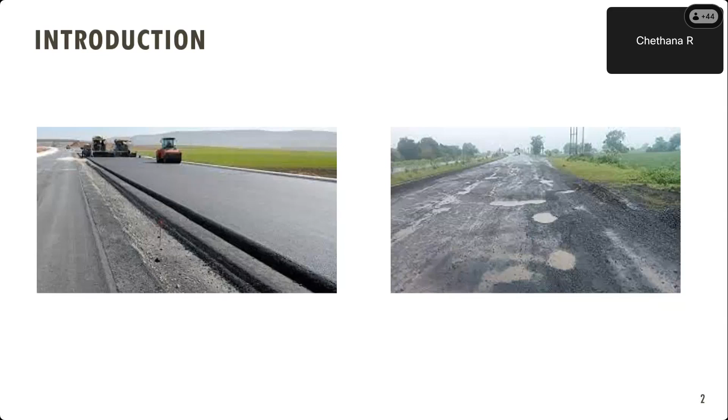Coming to that, I am just showing two scenarios. In India, we have heterogeneous traffic conditions, so most of the highways are loaded mostly by trucks: 2-axle, 3-axle, multi-axle trucks. Some of the highways might not be loaded. So that is the criteria that we need to be considering as well.

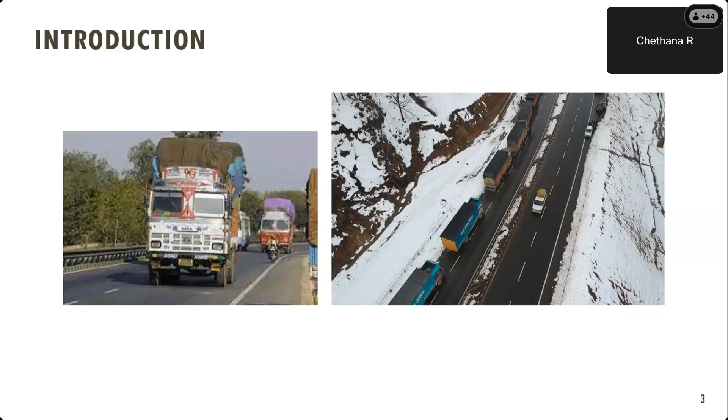When we say serviceability, since the pavement is an infrastructure, it is expected to behave in a certain manner, or be serviceable to the users who are using the pavement. Right from the excellent condition to the failed condition, which we saw in the second slide, a failed condition could be the end of the pavement, where it undergoes rehabilitation.

Again, we could be dealing with different kinds of maintenance strategies. We are not talking about a single material or a single kind of bituminous mixture, or any other type of material. We could have a wide variety of materials that could be chosen for the maintenance.

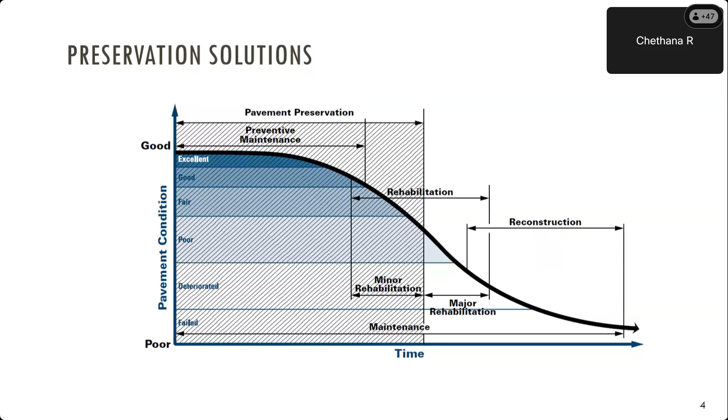The focus for the highway agencies these days is mainly to maintain the existing pavements rather than constructing new ones. We have a long length of highways across the country, the national highways, the state highways, etc. So the focus is on how to maintain them as well, apart from constructing or connecting different parts of the country. So we have different types of projects.

Currently, the scenario in India is where the maintenance is schedule based. What do I mean by schedule based? In the urban scenario or even on the national highways, there is an overlay provided to the pavement, such as bituminous concrete or stone mastic asphalt. In the second year, 4th, 6th, 8th, etc., whether the pavement has deteriorated or not, the maintenance strategies are carried out. So is that feasible economically?

I would like to differ there, because once the pavement has deteriorated, or we know that it's on the verge of deterioration, it would be wiser to carry out a maintenance strategy. That is what we call performance based versus schedule based. Currently what we follow in the country is schedule based.

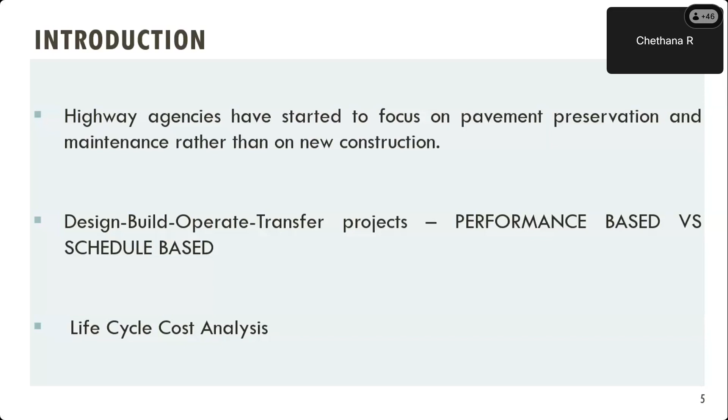So with that, in the slides to come, I'll be emphasizing more on a term called system. So what do we have as this system? We are talking about the pavement management system, where it is a set of tools or methods that aids the decision maker. When I say the decision maker here, we are talking about the agencies which take the construction, in finding ideal strategies, meaning the different kinds of maintenance strategies, for providing and maintaining pavements at or

above the desired serviceability. So as per the AASHTO, there is a certain criteria of serviceability supposed to be maintained or met when a pavement is constructed, over a span of time, which in our terms we call the design life, right? So with that, we came up with the PhD research topic, where we thought about the different criteria that are going to be affecting the pavement.

So we will develop a framework where each of the agencies who take up the projects, the flexible pavement construction, should go through a certain kind of procedure or methodology which they should follow during the course of time, from the construction up till the rehabilitation, and how they can improve the performance of the pavement accordingly. So we'll be talking about structural performance, functional performance. We'll deal with it a little in detail in the slides to come.

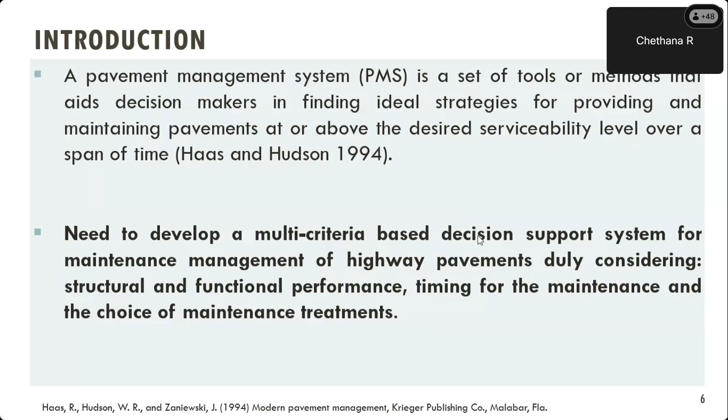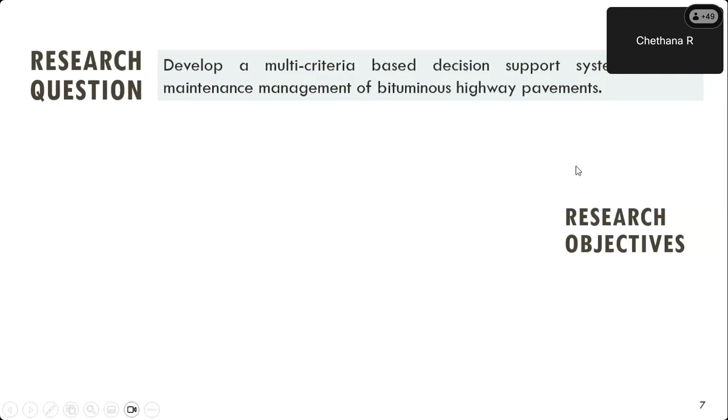So the research question here is developing a multi-criteria based decision support system for the maintenance of the bituminous highway pavements. We have certain research objectives which were fulfilled as a part of this work. First we'll talk about the performance prediction models. We have to know what is the performance. Performance, how do we measure them?

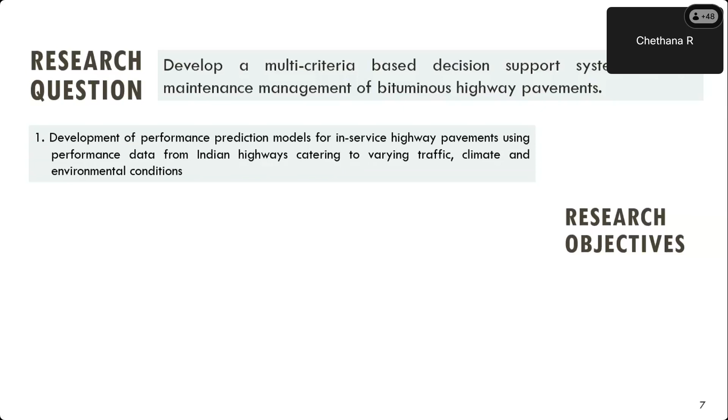Maybe in terms of the rutting that's going to occur, the cracking that's going to occur, or deflection measured either through the Benkelman beam deflection meter, which is kind of getting outdated, so we use the falling weight deflectometer. So we measure the distress parameters and try to project or predict them for the entire design life. So that's the first part of it.

Next, we develop a framework to decide the timing. I mentioned that we have different kinds of maintenance strategies. So what is the right time where we are going to maintain with different traffic levels? Of course, we talked about traffic levels because it's not uniform throughout the country, so we are talking about different traffic levels as well.

And next is to consider at what point should I maintain. I talked about the performance based versus the schedule based. So we'll talk about two terms called the trigger level and the threshold level, where we are talking about what is going to trigger the maintenance. How do I decide when I'll perform the maintenance?

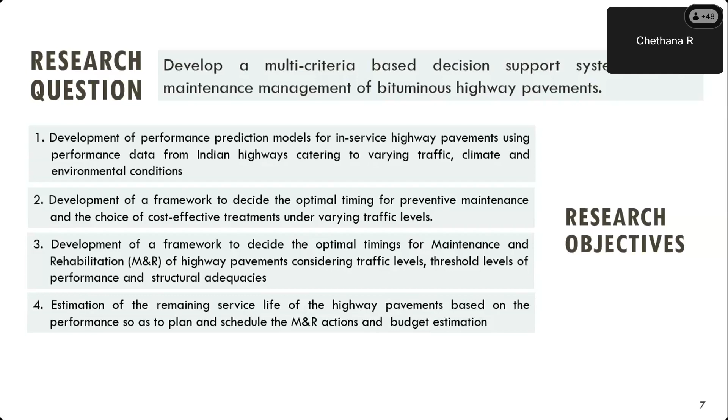Next is, once I do a maintenance strategy, how can I quantify the effect on the service life? Is the design life going to extend? The design life is 15 years. Can I extend it when I do this kind of a maintenance strategy? We'll also be talking about the economic aspect as well. So last, I'm going to give a framework considering all of the above parameters.

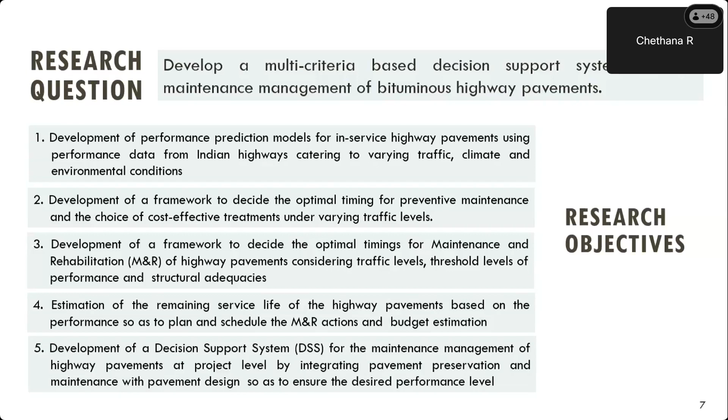So this is the methodology. The flowchart depicts the methodology. When we talk about pavement management, we have two levels. One is the network level, where I'm considering the whole state, maybe the whole state of Kerala. I can decide what is it going to be into Trivandrum, Cochin to Alappuzha, etc. So I can consider all the roads. On the contrary, I am talking about the project level.

I'm only talking about one stretch of road, so one stretch of road connecting point A and point B. So I'm going to deal in depth about the different kinds of maintenance strategies or the materials design, etc., only for that particular road. So what we are working here is only at the project level.

So next, we go to the performance prediction models, which I just spoke about, where we determine the different kinds of distresses. From the performance prediction models, I have different subtopics here, where we are talking about the structural and functional aspect. When I say structural, it is the entire layer or different layers of the pavement which is considered. Functional refers to only the top layer of the pavement, which is involved in the safe movement or the comfortable movement of the road user.

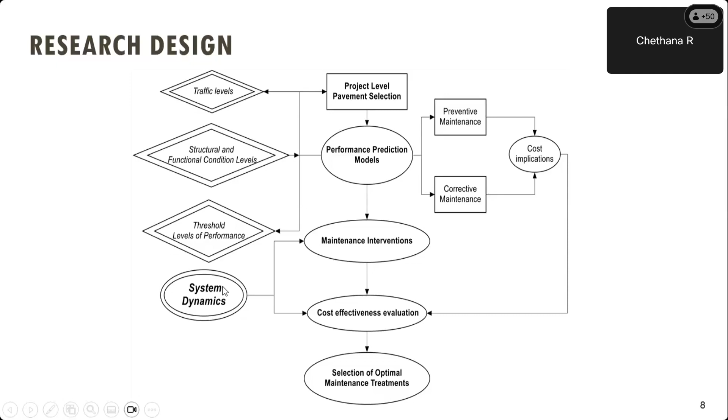So how am I going to model the whole thing into a single system? System is something which we'll be using very frequently. Pavement is not a single material or a single component. There are multiple components which are involved in the proper functioning of the pavement. So that's where we have modeled all of the parameters which we felt were influencing the performance of the pavement using system dynamics. So we will talk about the first objective.

The first one is where we decided to have some performance prediction models. There are four kinds of models that we looked at. Some of them were taken from the data that we used for modeling, which was one of the measured deflection areas in the state of Karnataka. So we have taken the actual data and done the modeling. First, the deflection prediction model, where we estimate the deflection in millimeters based on the initial level of deflection, when the pavement is constructed. Based on that, how is the deflection going to be over a period of time? That's the deflection prediction model.

Next, we have the rutting prediction model. Rutting, as we know, is the depression, or some deformation in the wheel path of the highway. So we are determining what the rutting is going to be. The cracking in terms of percentage: from the area of cracking, we'll be able to determine the percentage of cracking. And the last is the roughness prediction model, which is measured in terms of IRI in meters per kilometer.

In the current scenario for our Indian conditions, we have rutting and cracking. These are the two main parameters used as part of IRC 37 2018, where we consider some amount of rutting, like 20 mm, and 20% of cracking as the threshold up till which the pavement can be serviceable. But we do not consider other parameters like roughness, deflection, or even patching and potholes.

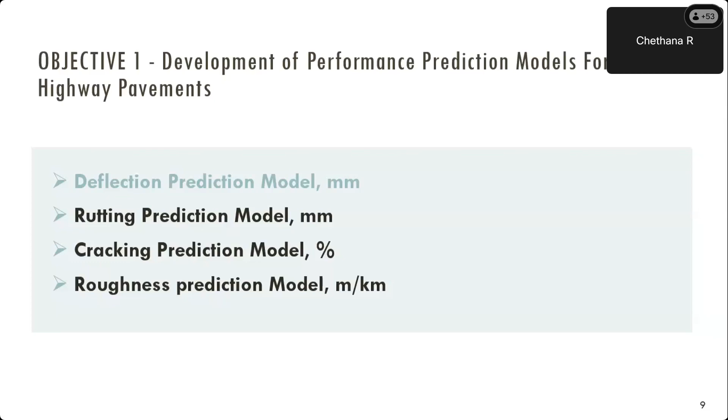So once we determine the performance prediction models, this model could either be a linear model or a non-linear model, based on the different data that we have collected and different parameters that we are going to consider.

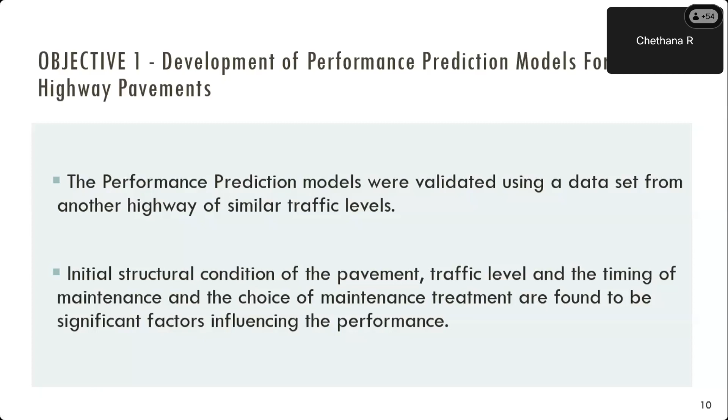This data was validated using another highway's data which more or less looked like a similar highway. The initial structural condition of the pavement, traffic level, and timing of maintenance were found to be the significant factors influencing performance. When we say significant or influencing parameters, most of the performance prediction was dependent on these three variables, hence they form a major role in deciding what treatment strategies we are going to adopt later.

With that, we come to the second objective, where we have the development of a framework to decide the optimal timing. So we'll be talking about different kinds of treatments and the cost. We have adopted 4 traffic levels.

So 75 is considered as a minimum traffic, considering that we are talking about national highways, and the maximum being 150 MSA. So 4 levels of traffic have been chosen, considering 75 as a low volume of traffic and 150 as a high volume of traffic. We have also considered a design period of 15 years for our pavements to predict the performance.

The procedure for prediction after we develop the distress models is very similar to what we have in the IRC code. After that, we are talking about structural adequacy with the initial deflection levels. I mentioned earlier that the structural adequacy, or the initial deflection level for the pavement, formed a very major influencing parameter to decide the performance.

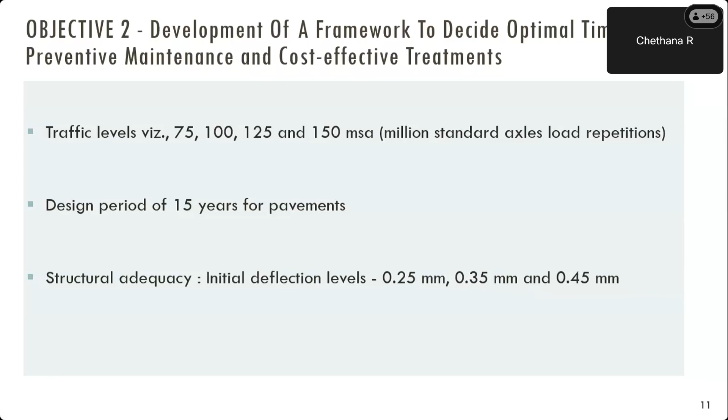So where we have decided these parameters, next we'll be talking about the choice. So we said we now have different traffic levels, then we have different initial deflection levels. Next is where we have the choice of treatments.

So we mentioned that the choice of treatments could be varied. With the advent of materials, or the research going on in materials, there is a provision to adopt a wide variety of materials. So even if I just take a simple bituminous mix, let's say for example bituminous concrete, I have different aggregate sizes, or the nominal maximum aggregate size, which I could be using for the surface layer. Again, the bitumen that I'm using could be very different.

So now I'm choosing routine maintenance. What do I mean by routine maintenance? Routine maintenance is something carried out on a general basis, irrespective of the performance of the pavement. That could be as simple as removing loose particles from the road, patching potholes, or maybe sealing the cracks. Very minor repairs like that come under routine maintenance, so they do not form a major chunk of the whole cost of the pavement.

Next is the preventive maintenance or minor rehabilitation. Preventive maintenance is applied even before the pavement fails, that is, when it is still structurally sound. When I say structurally sound, again, the deflection is very less. So even before it starts to deteriorate, I'm going to provide a certain kind of preventive maintenance.

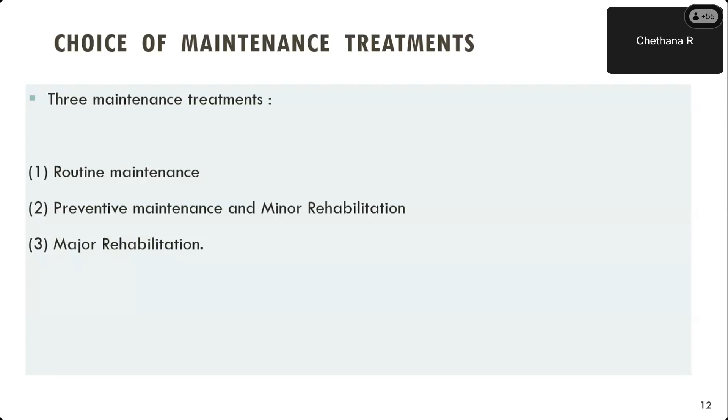As for minor rehabilitation, I'm talking about thickness of bituminous courses, like maybe 30, 40 or 50 mm of the pavement. Major rehabilitation is where we are talking about thicker maintenance strategies, like bituminous concrete and dense bituminous macadam, or bituminous concrete up to 75 mm thickness, maybe in 2 layers. So first we'll see the preventive maintenance, where we have varied options.

So we could have a fog seal, slurry seal, micro surfacing, or surface dressing. In surface dressing, we have the single coat or the two coat based on the kind of material availability or the functional deterioration of the pavement. We can choose preventive maintenance, but we need to remember that preventive maintenance is only applicable when the pavement is structurally sound. We can't go for preventive maintenance once the pavement has started to deteriorate.

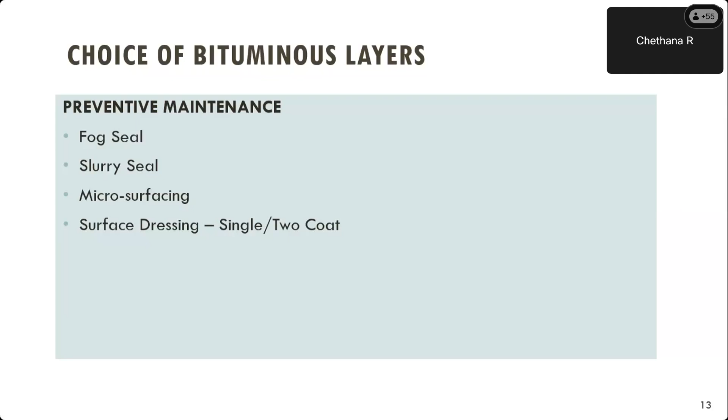So I was just mentioning about the choice of bituminous layers as well. Bituminous macadam is not generally used in recent years, but then we have dense bituminous macadam, SDBC, and BC. Even when I choose BC, maybe I use grade 1 or grade 2 BC, or grade 1 or grade 2 DBM.

Again, if I choose the binder, should I use a modifier? Should I use an elastomer? Should I use a plastomer? Crumb rubber modified bitumen is something which is being explored, and in the recent past, even plastic and shredded glass could be used in the binder. So we have a wide variety of options.

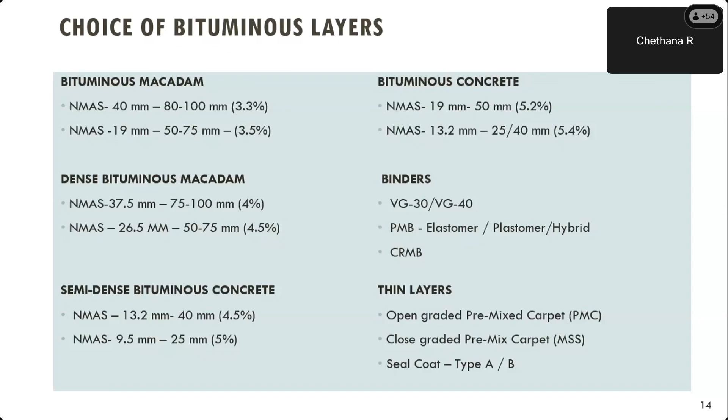And if we talk about the thin layers, we have the pre-mixed carpet, the mixed seal surfacing, or the seal coats. So I have a wide range of materials or mixes that I could be using.

Apart from that, when we talk about major rehabilitation, I also have different materials that could be used. So if I talk about the bituminous mixture, am I going to use something which is recycled, or let's say the warm mixes, which is gaining importance very recently? So we have the warm mixes or what we call as the recycled RAP.

Again, if we do the recycling, the decision lies whether we do it in situ, that is in the field, or do a plant recycling and go back to the field. There are a wide variety of options available, and we need to explore based on availability or economic aspects, what is going to fit the project that is taken up. So all of it may not be possible, or maybe one of the options might be wrong, so we need to explore what would be the feasible solution.

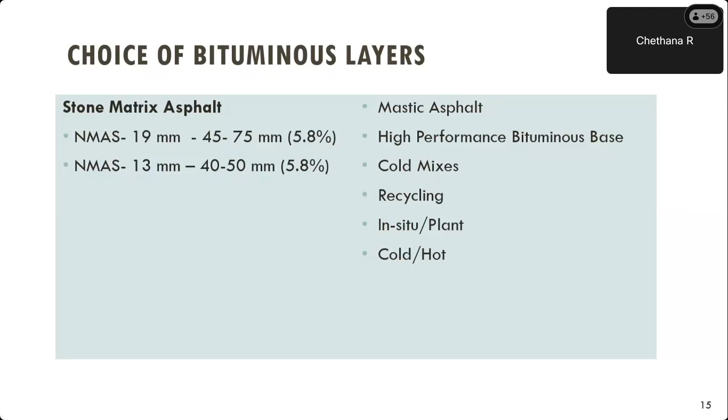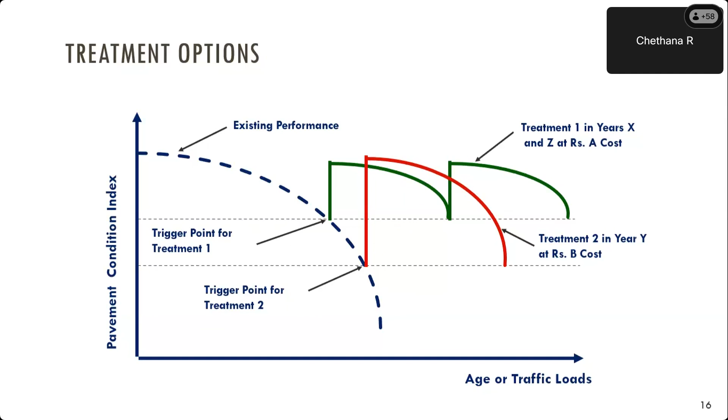So next we were talking about the pavement as a system. We talked about the traffic, initial levels, or the material itself. So how do we actually consider this as a system and how do we model it is something we have done using the system dynamics tool called PowerSim. This tool helps us model the whole behavior of the pavement, or the different components and influencing factors of the pavement modules, into a single system.

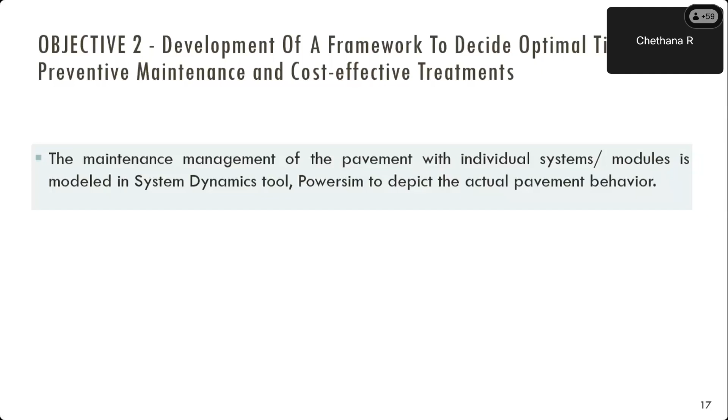So we have developed different modules like this. One is the traffic module. Here you can see the structural module and the functional distress module, where we are talking about the initial deflection and how that's related to the progression of roughness. Then we have the structural distress module, where we consider different strategies. So I have the initial deflection, and if I perform a particular kind of treatment, how the performance is going to be is what I'm going to model. I've shown each of these as different parameters or modules here, but they're all interconnected to form a whole single module, which we are talking about as the system.

So we also have the structural distress module, and the cost module, where we talk about cost of different kinds of treatments, preventive maintenance, corrective maintenance, etc., and what the cost is going to be at the end of 15 years. However important it is for the pavement to behave in a particular manner, in a developing country like ours, it becomes important to also look at the economic parameter. So this is where the implication of cost comes into picture. We also have a traffic module, and all these modules, the cost and distress modules, are dependent on the traffic module, because there is no deterioration of the pavement without traffic. So that is something we need to rightly project.

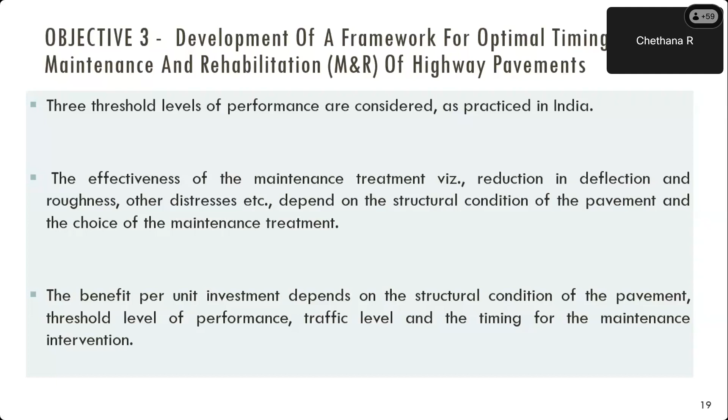So what is the benefit that's going to occur when we adopt the threshold level differently? If I do maintenance at 2.5 meters per kilometer roughness versus at 3.5 meters per kilometer, what is the benefit to the agency? We'll talk about the benefit area in a while, but before that, we have adopted 3 threshold levels.

For roughness and deflection, one depicts the functional parameter and the other, deflection, depicts the structural parameter. Why only deflection, and not rutting or cracking? Because rutting and cracking are a function of deflection. So though I project them separately as different parameters, they are again correlated to deflection. Hence we have taken deflection as one parameter.

When I say threshold level 1, I'll provide a preventive maintenance. If the roughness increases, or as soon as it reaches 3 meters per kilometer, I'm going to provide a preventive maintenance. Why is the deflection criterion not used here? Because when we do a preventive maintenance, the pavement should already be structurally sound, so we are not talking about deflection in the preventive maintenance.

For a minor rehabilitation, as soon as the deflection reaches 1 mm, I am going to perform a minor rehabilitation - this is when the bituminous concrete or DBM layer thickness is less than 50 mm. For a major rehabilitation, when the pavement becomes very rough, around 6 meters per kilometer, or the deflection reaches 1.25 mm, I'm going to perform a major rehabilitation.

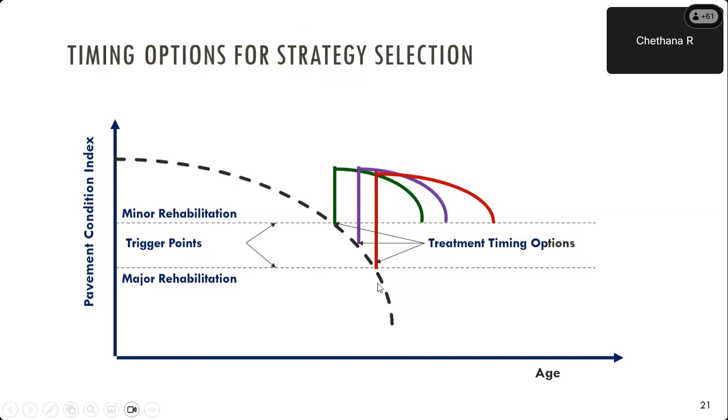Likewise, I have defined different values for threshold 1, threshold 2, and threshold 3, where we are going to perform maintenance. So what is the benefit area we are talking about? We have the minor rehabilitation, where the point at which it triggers a performance or maintenance is the trigger point, and the level beyond which it should not increase is what we have defined as the threshold level. So we have the minor rehabilitation, the threshold level, and the major rehabilitation as a typical performance. So what do we understand now by the benefit?

So this is the first deterioration of the pavement. I perform, this is the threshold level beyond which it should not be moving down. So I give a maintenance strategy, and then the performance increases. Again, after the material starts to degrade, it's going to deform again, and there is going to be deterioration in the pavement. So the area below this performance curve is what we call the benefit area. So this is for one kind of strategy.

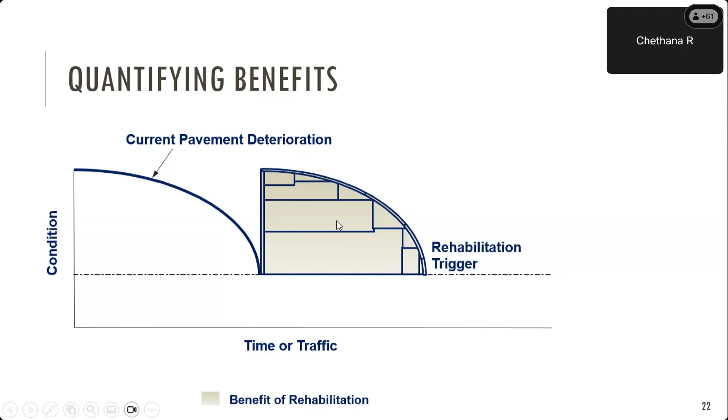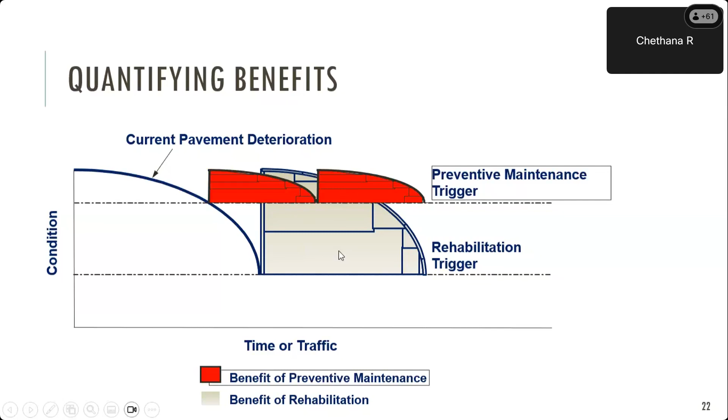Now if I consider preventive maintenance, that's when the pavement is structurally sound, even before it starts deteriorating, I'm going to provide a treatment. The area under this preventive maintenance or rehabilitation is what we define as the benefit. This is for the entire condition of the pavement. What we have here is given for roughness.

I've just shown typical graphs here where the roughness is continuously increasing for the design life of the pavement. But at a particular year, or when the threshold is reached, if I provide a maintenance strategy, the value of roughness comes down, then increases, comes down, and again increases. So the benefit area is the area between the curve with no maintenance strategy carried out and the curve where a strategy is carried out. The difference or area between these two performance curves is what we call the benefit area.

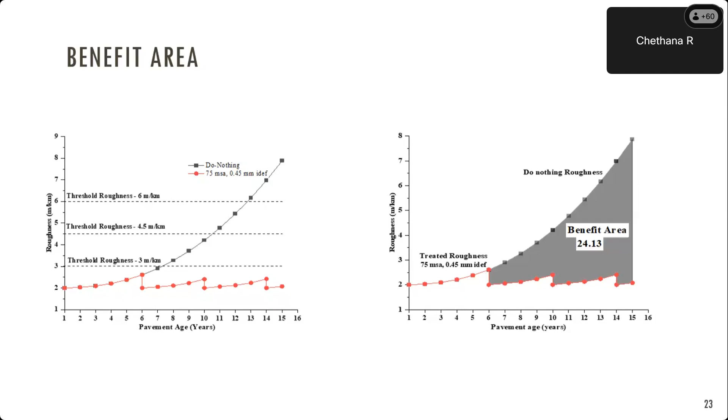This benefit area is computed for different traffic levels and different levels of initial deflection. Then a comparison was done between the three levels of thresholds we just spoke about, and the benefit area for each was considered.

What we understood from the implication of the different threshold levels was that pavements always perform better when the deflection, or the initial deflection, is less. So how do we ensure that the initial deflection level is less? Generally pavements do not have high roughness and deflection at the initial stage, but with the right kind of construction practice or quality control of materials at the site, the initial deflection can be maintained at a lower level. So threshold level 2 or 3 is where we saw the highest benefits.

The next important parameter we observed was preventive maintenance. The timing for preventive maintenance is when the roughness reaches 2.5. For corrective maintenance, we had a certain value. So whatever we decided as part of the threshold level, the benefit also came accordingly. That is something which was observed.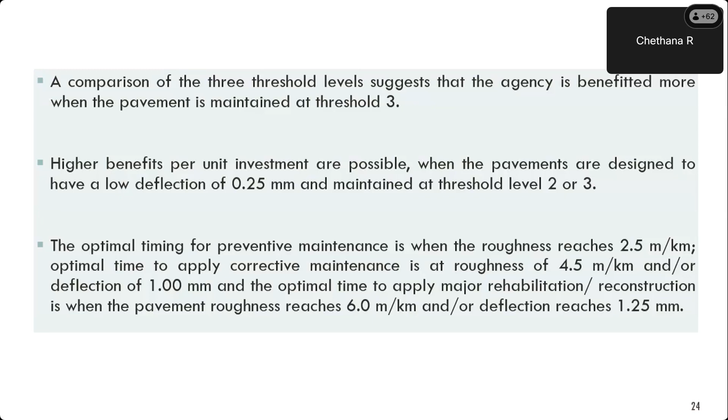And how did we decide? These are some values which we got from the schedule of rates available in different states. We just took the values for pothole repair or BC overlay of 30mm for different conditions, under different parameters and different heads. Then we determined the cost per 2-lane kilometer, and used that for computation of the benefit cost.

So now I need a parameter which actually decides what strategy is helpful. I quantify that with different yardsticks by which I can do the economic analysis - benefit cost ratio, NPV, or IRR, etc. Here we have just used the benefit cost ratio, and I'm showing a sample calculation.

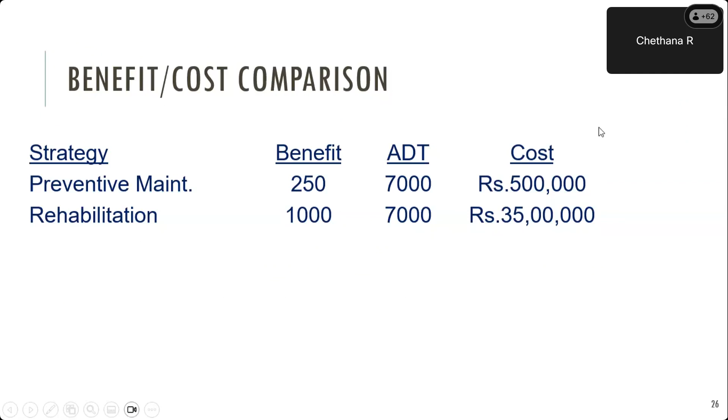I have the benefit area of a certain value, then the ADT, the traffic, and the cost. So I determine what the benefit cost ratio will be given a certain scenario. This way we have computed the cost for all of this. I'll show that in a while.

This is a summarized table showing different traffic levels that we have adopted, and different initial deflection levels, which we say was a very important parameter. What you see here as 1, 2, 3 refer to: 1 is routine maintenance, 2 refers to preventive maintenance or minor rehabilitation, and 3 refers to major rehabilitation. So if I take 75 MSA and 0.35mm initial deflection level, I'm going to do routine maintenance every year - this is irrespective of any other maintenance carried out. In the 7th year, when the threshold level changes or increases, I provide preventive maintenance.

So again, it is good to go for another 4 years before I can carry out a major rehabilitation. This is because the initial level of deflection is high. If I look on the contrary for 0.25 mm deflection, instead of just sustaining for 4 years, I can sustain up to the end of the design life. So this is the kind of impact that the initial deflection has on the performance of the pavement, which needs to be very carefully looked at.

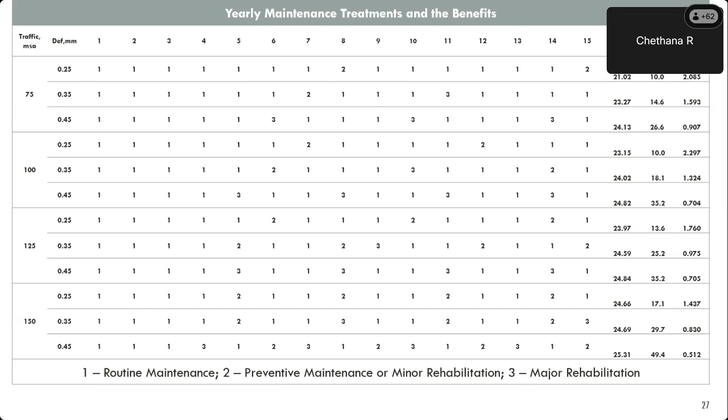Based on the benefit area and the cost incurred because of the routine maintenance, preventive and corrective maintenance, the cost was calculated, and then hence we determine what's the benefit cost ratio. And we very well know that the higher the benefit cost ratio, the more beneficial it is to the agency.

So the next objective we'll be looking at is whether the life of the pavement is going to be extended if we use a particular treatment, right? So we have considered deflection as the main criteria here.

So if I now provide, let's say we have 75 MSA and 0.35 mm as the initial deflection. If I provide a treatment here, a preventive maintenance, that is the blue one, and then we have a corrective treatment, then definitely the deflection drops down and then it increases. So instead of failing at maybe the 11th year, the pavement is going to sustain for another 5 years and be serviceable till the end of the design life. So by this, we mean that there is an extension of the service life for another 5 years instead of failing at the 11th year.

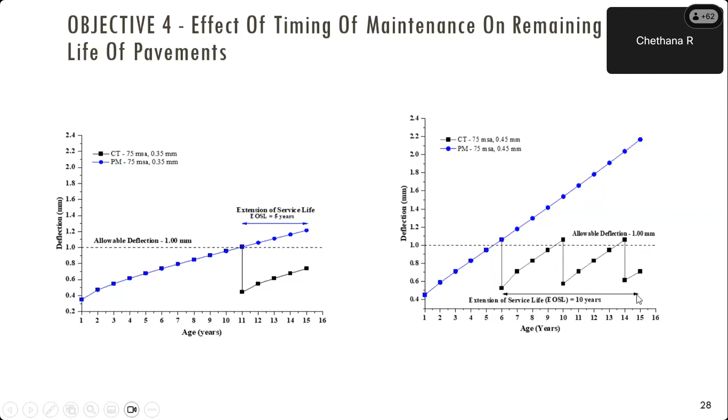Similarly, for 75 MSA and 0.45 mm deflection, instead of failing at the 6th year itself, because the initial deflection is quite high, it's going to be extended up to like 10 years, where it's going to fail in the 6th year, up till almost 15 years it's going to sustain. So we have this for different traffic levels and the initial deflection.

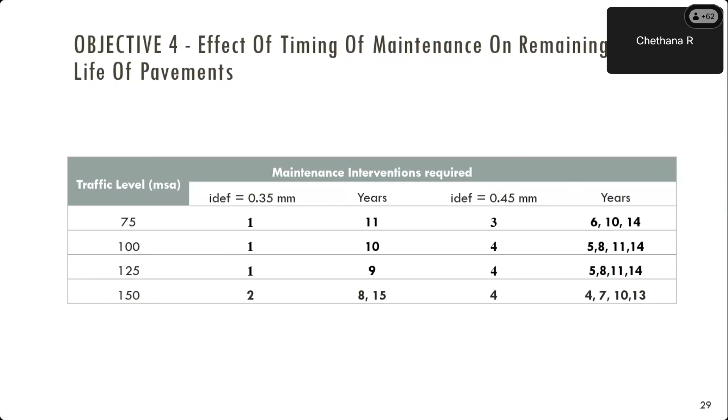So we see that as the initial deflection increases, the number of treatments also increases, as well as the cost increases. So that's something which needs to be taken care of.

So here I've plotted where we have the acceptable service level, or what I also call the threshold level. The red one is where we have the high initial deflection, then we have the green color one for the medium deflection level, and the blue one for even less. The blue one, as you can observe, is rarely coming down up till the acceptable level. So it is not going down beyond the acceptable level, which suggests that the initial deflection needs to be very less if we need a better kind of pavement, right?

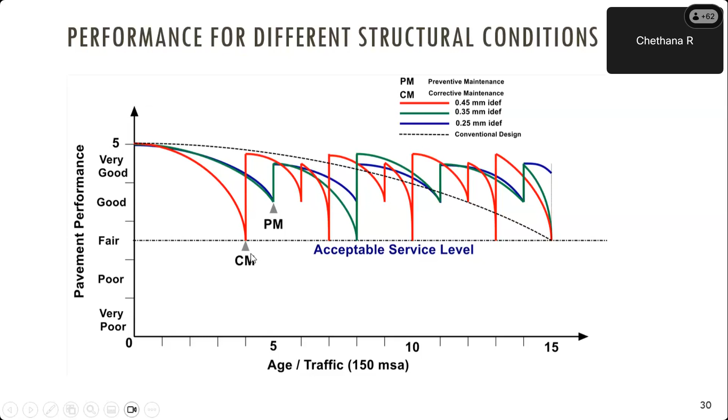So again, PM, where we are talking about preventive maintenance, and here we are talking about corrective maintenance. So we just summarize the whole thing where we have the different traffic levels. As you can see, we have 75 MSA, 100 MSA, and then 125 and 150. We have considered for all of these traffic levels, different threshold levels of 1, 2, and 3, and the initial deflection parameters. And we have tried to determine what's going to be the highest benefit cost ratio, which is going to be beneficial or help the agency economically.

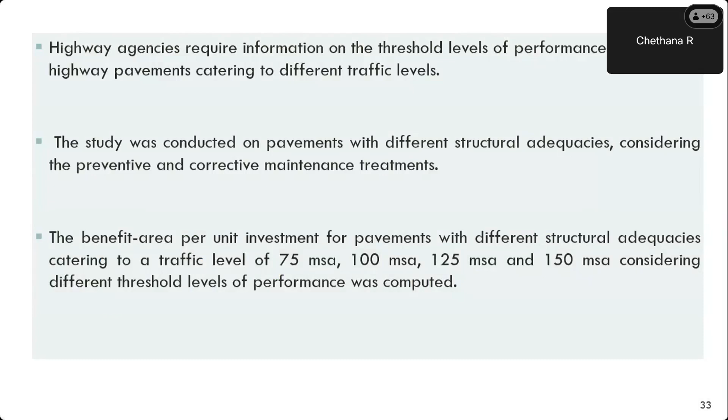So the highway agencies, what we are talking about, are different agencies. One is they need to be briefed up, or they need to be sure of what is the threshold level that needs to be carried out. So we have talked about different structural adequacies, etc., with different kinds of treatments. So these are the likely suggested threshold levels for different kinds of traffic levels and initial deflection levels. I think mostly threshold 3 is the one which is used across, or which is feasible, or I would say optimally feasible across the different kinds of traffic levels.

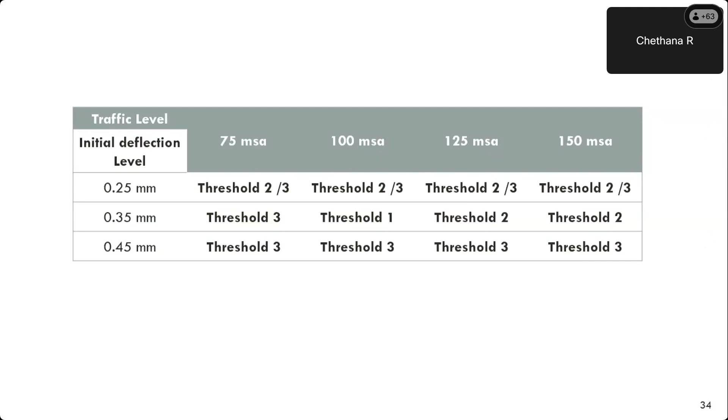So I would just like to summarize in the next 2 slides. We have spoken about pavement as a system. Generally what is done is we do the pavement design, but we do not consider the maintenance aspect at all. We do not decide what is the performance, or what is going to be the cost of the performance, etc.

So we only do the design, we get the different thicknesses of the pavement, we check for the rutting criteria to be satisfied, we check for the cracking criteria to be satisfied, and then that's it. So what we need to look at is all the different agencies which deal with pavement engineering, or how we should be practicing, is that we should deal with it as a system rather than as an individual component. So the pavement is encompassed by a variety of components, as we have understood.

So next is the cost. One is the road user cost. At no point of time do we evaluate what is the road user cost. All that we have been evaluating is the agency cost, that is, what is the concessionaire going to be benefiting, or how much is the cost that is incurred to the concessionaire, etc. At no point of time is the user considered. So that's something which needs to be looked at.

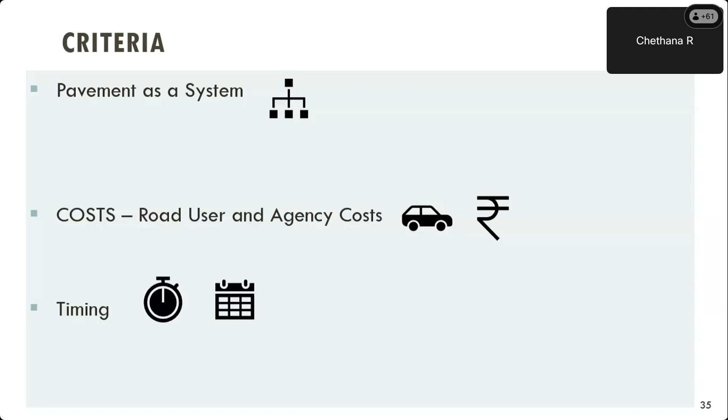We have road user cost studies done decades ago, but with the different kinds of vehicles, the electric vehicles, or when we are using alternate modes, alternate types of fuel, right? So what would be the cost implication across different kinds of usage of fuel, etc., is something we can look upon. And then the timing is very important. So the year of maintenance, or the point where it needs a maintenance or a strategy to be used on the pavement, is something which we'll be looking at. So we'll just list it down.

So what could be the possible framework that all of us could be using across the country? And since NATPAC is something which deals at a national level, I'm putting this across in this forum, because where we are talking about different kinds of distresses, we should be looking at a similar format of collection of data throughout the country. If we take an example of the US, they have decades and decades of data available for the modeling aspect. I'm not saying that the roads there are very good, but when we compare a few of the criteria, or the methodology adopted, maybe that is something which we can adopt as well. So normalized across the country, maybe the equipment that we are using to collect the distress, or the data sheet, can be uniform. We can come up with a code where we say these are the parameters for data collection that we need to look across.

And then we have the prediction models. So this becomes site specific. I have designed the model for the state of Karnataka. I can't use the same thing in Kerala or another region. So that's something which needs a little thought. And what are the main influencing parameters is what we need to correctly identify. Then the decision of the right maintenance treatments, where we have a large variety of materials. Then the timing. And after all of this is done, we need to again start evaluating the pavement.

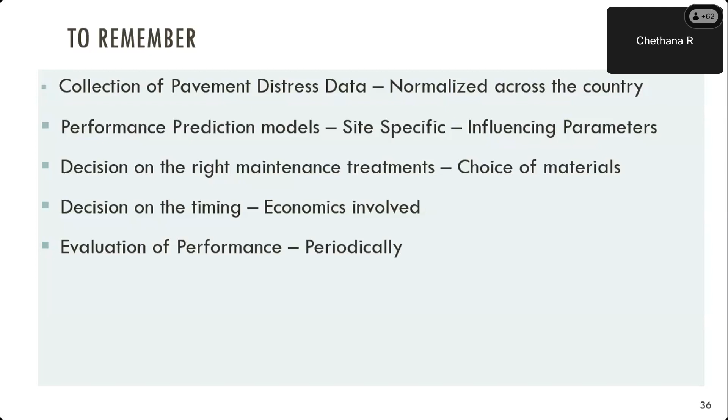So our work does not stop at collecting the data, predicting the performance, or giving a certain maintenance strategy over a period of years. For example, even the deflection data that I had, we had around 3 to 4 years of deflection data which we could use. So unless there is some periodical evaluation of the pavements, I don't think a comprehensive model could be developed. So maybe if we consider these parameters in order, there could be a good decision support system for the pavement.

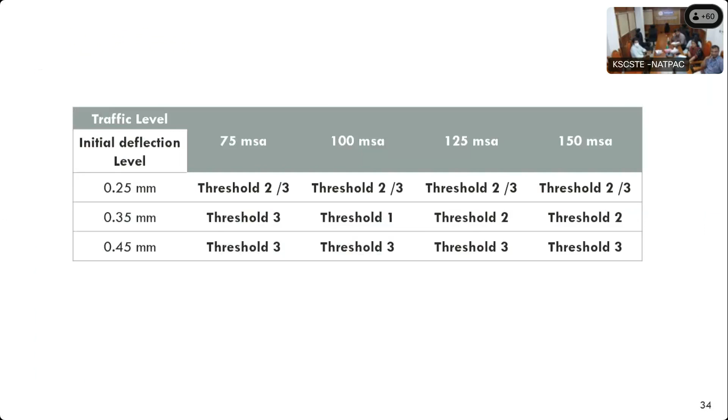Yeah, I have a question. You had mentioned the deflection values in the initial slides; you had benchmarked three deflection values. So those deflection values corresponded to which layer actually? Deflection, we are talking about the top layer. So you had considered only the deflection of the top layer for evaluating this theory, right? Yes, yes. So why were the deflection values of the lower layers not considered?

So if we consider rutting, for example, rutting could be a function of, let's say, insufficient compaction of the bituminous mixture or some failure in the subgrade, right? So there could be different aspects, different layers when we are talking about rutting. But if we talk about cracking, again, there are two types of cracking: top-down cracking or bottom-up cracking, right?

So why I'm saying that this data is a function of the top layer is that the deflection data was collected using the Benkelman beam deflection meter, right? Whereas with the falling weight deflectometer, we can back calculate and determine the deflection of the different layers, starting from the top layer up to the base layer. Since the data we used was from Benkelman beam deflection, it is not a characteristic of the lower layers. That is the reason I have taken it.

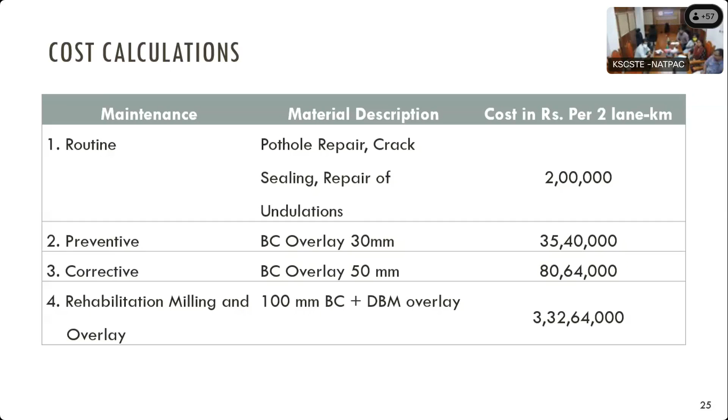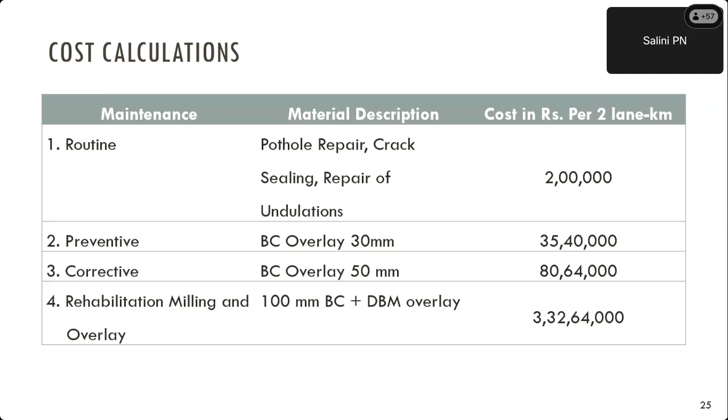I would like to ask you about the incorporation of drainage characteristics or climatic and environmental factors in the system dynamics approach, whether they were included, because in regard to Kerala, factors like rains and climate are going to be very aggravating factors in the decision of routine or periodic maintenance. So I would like to know how these elements could be incorporated in this approach, or any thoughts on that. Yes, ma'am, sure.

Yeah, I agree, because Kerala has high rains. So routine maintenance needs to be very carefully looked at, or even preventive maintenance. What I could do is probably in the distress module. I have not considered the climatic aspect here, or maybe it is indirectly considered where I choose the kind of binder that I adopt, right? Some of the binders I use can withstand extremes of temperature. Some, where the viscosity is less, are for a particular kind of climate.

So I can adopt a different kind of binder that is more hydrophobic, right? That is one way I can incorporate the material parameter, or otherwise I can consider a separate module for cracking where I can predict cracking or rutting, any kind of distress, based on temperature. Again, I need periodic or historic data to be made available, else I'll not be able to predict the performance.

So maybe before rains, if we know what kind of performance Kerala roads have, and then after rains we have an evaluation of it, the comparison would probably give an idea of choosing what kind of binder will give what kind of performance. Temperature can likewise be adopted in the module.